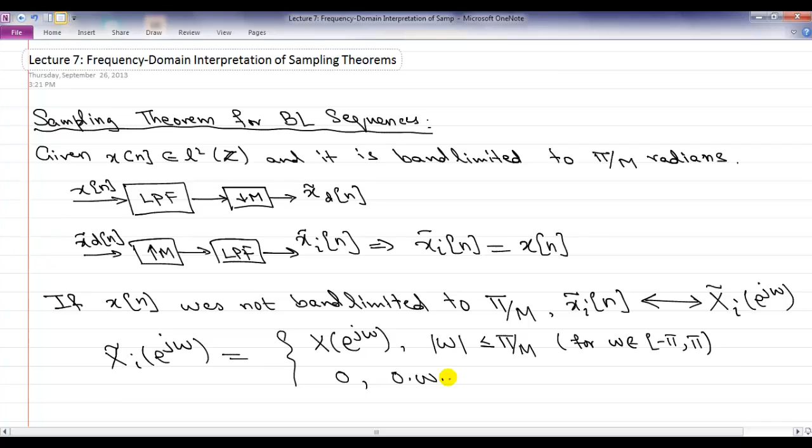So that is what this lecture and perhaps the next lecture will be about. We are done doing the basic expressions for sampling of continuous and discrete time sequences. We are now going to move forward towards the frequency domain interpretation of different components of these sampling operations. So the operations we have seen in the continuous time sampling, discrete time sampling, there are two main types of operations. There is filtering operation, and there are these sampling operations or conversion from sequence to an impulse train, or this decimation or upsampling. So let's look at, of course, the filtering operation.

So we are given a signal and we do filtering of that. Now the input could be continuous time or it could be discrete time. So x of t or x of n. At the output we get y of n or y of t. As long as the filtering operation, this block is LTI, we exactly know how the inputs and outputs are related.

So if we say that the filter is given by, in discrete time it is hn, which has h of e to the j omega, and in continuous time it is ht, which is h of j omega, we know exactly how they affect the output. So in the discrete time, in frequency, the output is simply multiplication of your DTFT of the input times the frequency response of your filter. Similarly, in continuous time, we have a similar expression. The output frequencies are simply the product of the input frequencies and the frequency response of your filter.

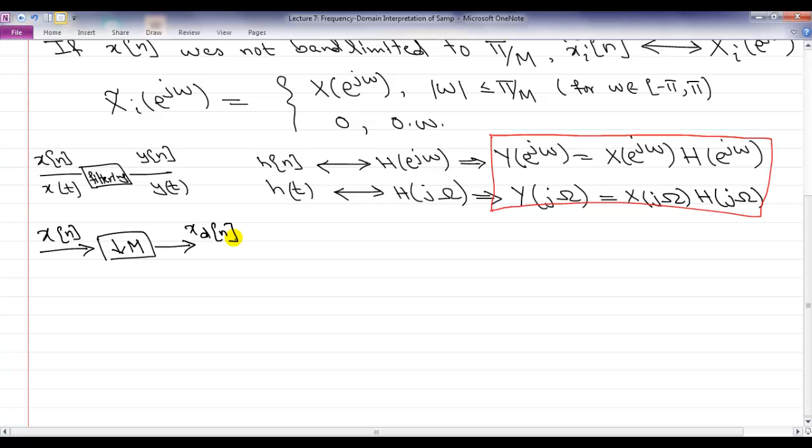Since we were talking about discrete time systems, let's continue our discussion of those. One of the components we studied was this decimation operation. You are given some sequence xn, you get xdn. So let's understand what this decimation operation does in the frequency domain.

The analog of that in the continuous domain is that we got x of t, we multiply it with an impulse train s of t, so summation delta of t minus nt, and we get back xs of t. And if you remember, we were able to show that this xs of j omega is simply given by scaling of your amplitude and multiple copies of the Fourier transform of your input signal. It's given by xj omega minus 2 pi k over t.

We are looking for some sort of similar expression in the discrete time case. So the question we are asking is, if this thing has a Fourier transform xn, x of e to the j omega, and this thing has a Fourier transform xd of e to the j omega, what is the relationship between these two if you pass them through this decimation operation? That is going to be our first goal.

Now to do that, we have to again do the same trick as we did in the continuous time, which is we try to express this operation as multiplication with some sort of an impulse train. Remember the definition of decimation, which is xd of n is given by xn of m for n equals 0, plus minus 1, plus minus 2, and so forth. So my goal is I'm looking at this xdn, which is given by every m samples of my original signal xn, and I'm going to express this as multiplication with an impulse train.

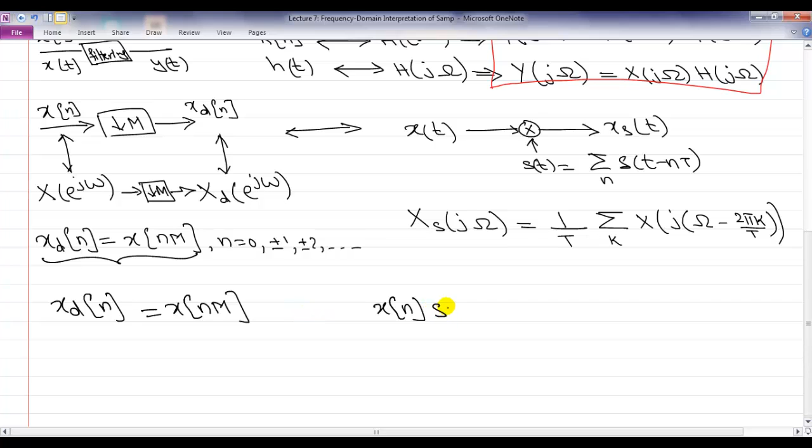So whether I write this as xdn equal to xnm, or I multiply my x of n with s of n, where s of n is an impulse train, so x of n times summation from k minus infinity to infinity delta of n minus km, and I now subsample this thing every m samples to get back xdn. The claim is that both of these operations are the same.

So why? Because what is xdn doing? It is collecting, it is keeping the mth sample and throwing away every m minus 1 samples. Now what is this thing? This is just an impulse train which is non-zero at multiples of m and 0 everywhere else, up to m minus 1.

Now whether I first downsample my xn directly, or I multiply my xn with this train, which is going to actually make all my samples between 0 and m 0, and then downsample, it's going to be the same operation, because the values that I'm going to make 0 in xn, those values I was not going to keep anyways.

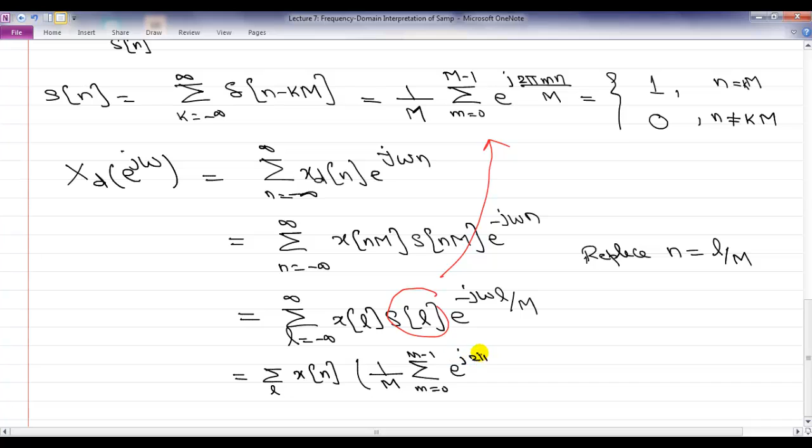Now I am simply going to replace this value of S[L] using this formula. So I get a summation over L of X of n, times 1 over m, summation m equals 0 to m minus 1, of e to the j 2 pi m L over m, times e to the minus j omega L over m. So I'll just replace this S[L] with its formula.

Now I'm just going to do a change of summation order. I'll bring this summation over m outside and take the summation over L inside. So I'll get 1 over m, summation of m equals 0 to m minus 1, and the other summation is L from minus infinity to infinity, X of L, times e to the j 2 pi m L over m times e to the minus j omega L over m.

So that is 1 over m, again summation over m, 0 to m minus 1, summation over L, X[L], and I'm going to put both of these exponentials together, so I get e to the minus j times (omega minus 2 pi m L over capital M).

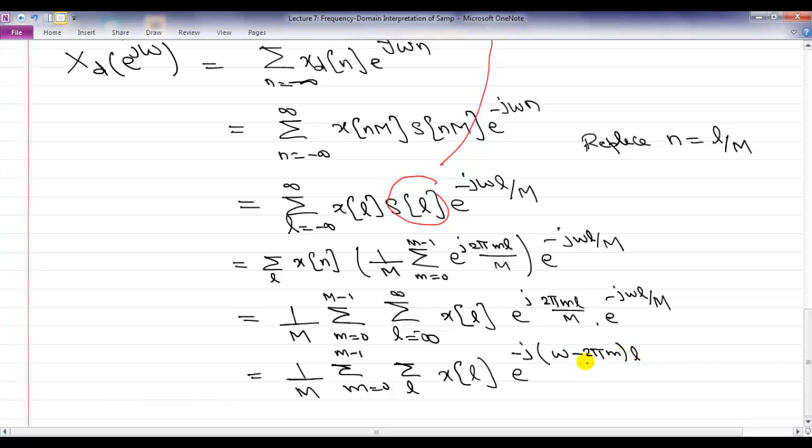Now, just to remind ourselves, we are computing xd(e^{j omega}). Let's look at this expression inside the first summation. What is this expression? It is simply equal to x[n] e to the minus j omega n, with omega replaced by omega minus 2 pi m over capital M. In other words, this is just the DTFT of x[n], where instead of omega, I have omega minus 2 pi m over capital M. So this whole expression is simply X(e^{j(omega minus 2 pi m over capital M)}).

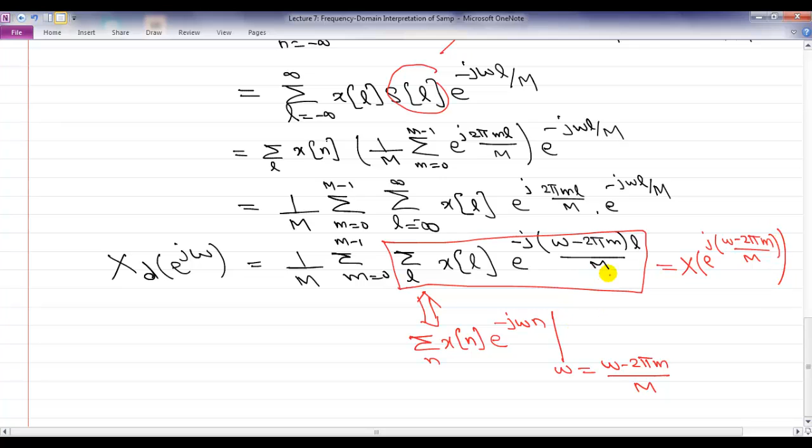Which means that the Fourier transform of my decimated signal is simply 1 over m, summation of m equals 0 to m minus 1, of X(e^{j(omega minus 2 pi m over capital M)}). So that is the relationship between the input and the output of a decimator.

What is the relationship saying? First of all, your output frequencies are simply given by your input frequencies, scaled by some factors. There is first an amplitude scaling by a factor of 1 over m. If you remember what happens to the frequency of xs(t), there was a factor of 1 over T there—it's very similar in discrete time, there's a factor of 1 over m. There's also a scaling of your frequency axis by a factor of m—this thing is doing frequency axis scaling by m.

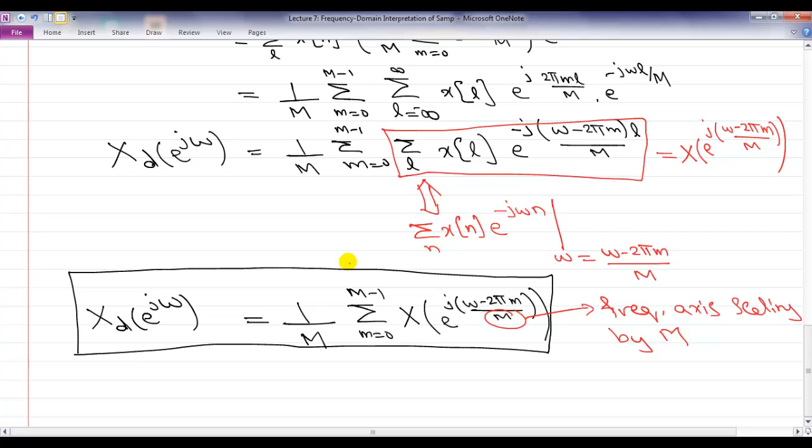The main thing that happens in the case of decimation is the following. Decimation does three main things. Number one, xd of e to the j omega has amplitude scaling by 1 over m - that is very analogous to the continuous time case. The other difference from the continuous time world is that you get m copies of the DTFT instead of infinite copies as in continuous time.

The third thing is that each copy is, number one, scaled in frequency by a factor of m, and then number two, shifted by an amount of 2 pi m. So decimation does these three things: it scales your amplitude, gives you multiple copies - m number of copies - and each copy is given by scaling your frequency axis by m and shifting by 2 pi m.

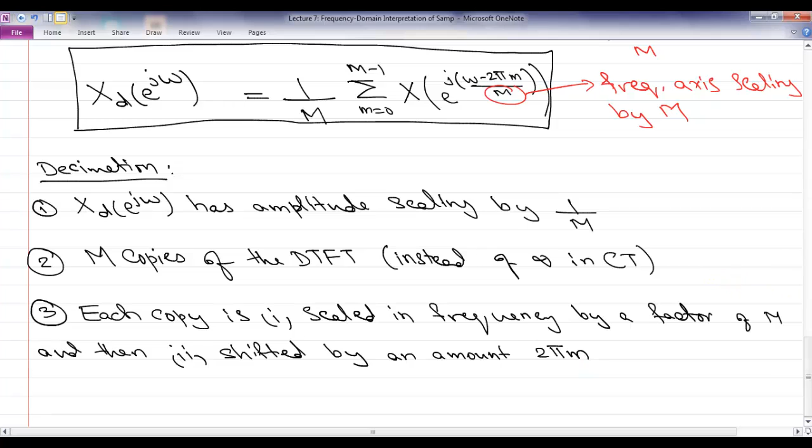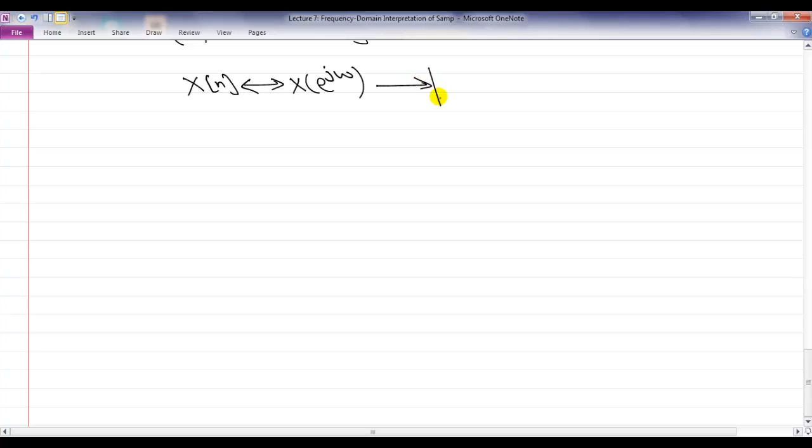So let's take a look at an example to give you a better sense of what happens. Let's say you are given an xn, whose Fourier transform is x of e to the j omega. You decimate it by a factor of 2, and we get xdn, given by xd of e to the j omega in its Fourier transform. Let's look at what this does, assuming that x of e to the j omega is given by the following.

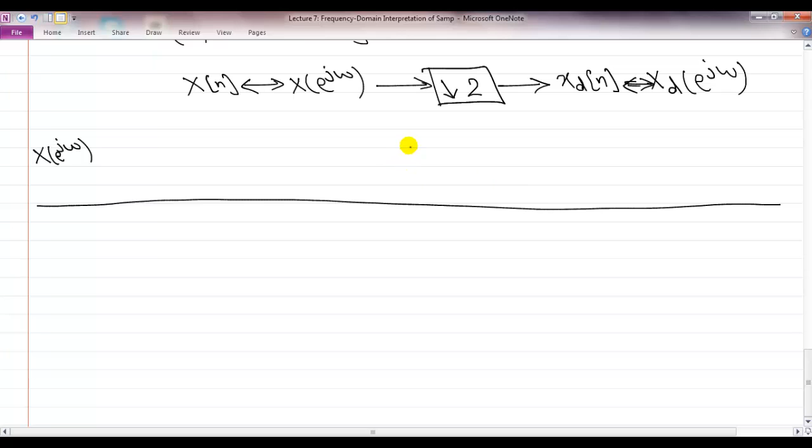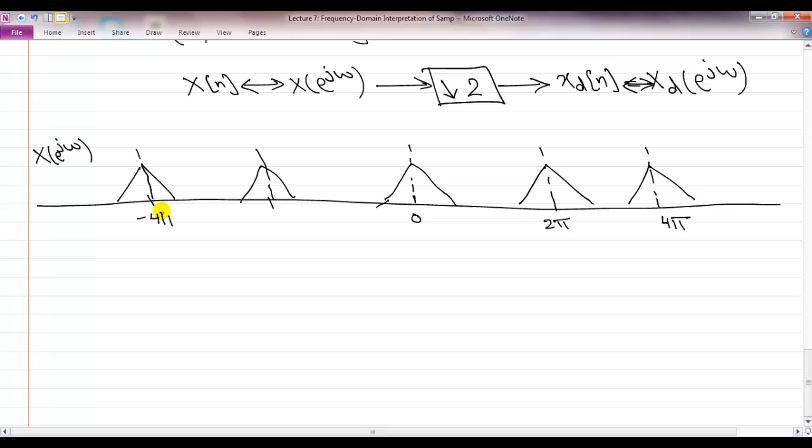Let's take our usual diagram of a triangular region. This is my 0, my 2 pi, 3 pi, 4 pi. So this is 0, 2 pi, 4 pi, similarly minus 2 pi and minus 4 pi. Minus 2 pi, here is pi, here is 3 pi, minus pi, minus 3 pi.

To compute this, we need to first look at two copies of this same Fourier transform. Each copy's amplitude is scaled by 1/2. So I have replica 1, which is simply x of e to the j omega minus 2 pi times 0, which is 0 over 2. What would that replica look like? First, your amplitude - if this amplitude was a, it becomes a over 2. Now the endpoints, let's assume for concreteness these were at pi by 3 and minus pi by 3.

This whole frequency axis is getting multiplied by a factor of 2 - things are being stretched. So this pi by 3 frequency moves to 2 pi by 3, ending up at 2 pi by 3 and minus 2 pi by 3. Now this 2 pi copy gets multiplied by 2 and ends up at 4 pi - so this one comes down and moves to 4 pi with a height of a over 2, since you have a stretching of the frequency axis. Similarly, this copy will move to minus 4 pi, again minus 2 pi times 2, with a height of a by 2. So this first replica has nothing between minus 4 pi and 0.

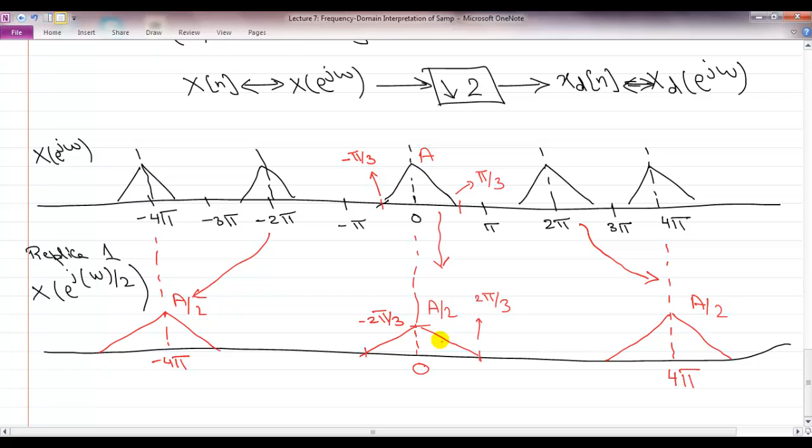Now the second replica, replica 2, is given by x of e to the j omega minus 2 pi over 2. You can actually derive this from replica 1, because it's the same thing - I should have a 1 over m factor since I'm reducing the height by a factor of 2. So to figure out what this replica looks like, you just look at the above one and shift it by a factor of 2 pi. This means that this copy will actually move to 2 pi with a height of a by 2. And this minus 4 pi copy is moving to minus 2 pi.

And there is, of course, nothing at 0 or 4 pi and minus 4 pi. So these are the two replicas, and to get to the final Fourier transform, we just add them both up.

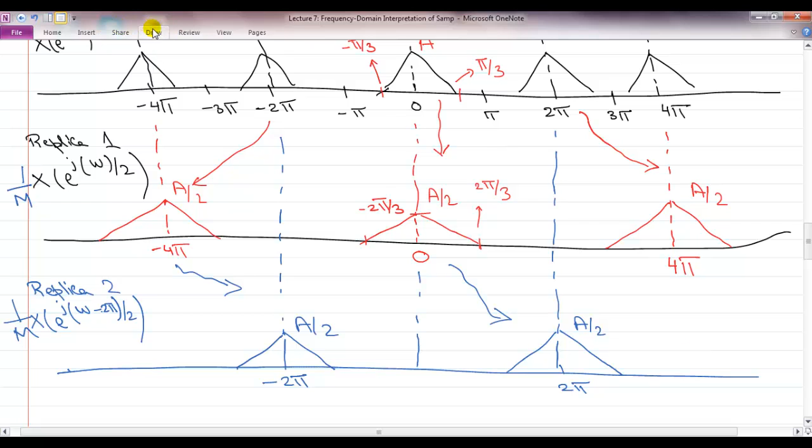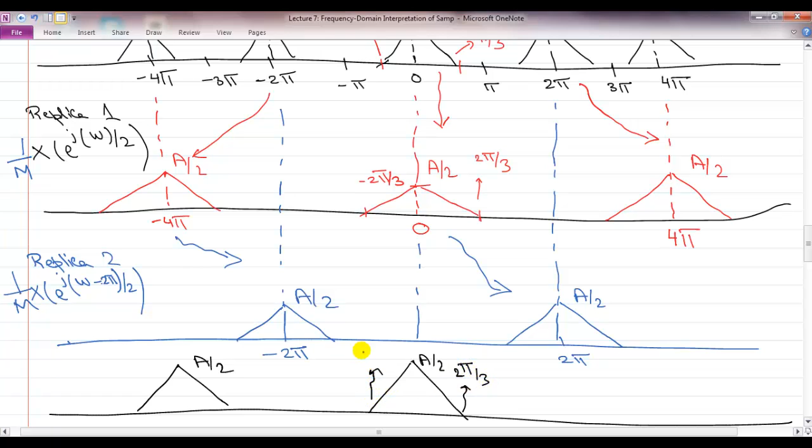If I add both these replicas up, what I get back is a copy here due to the red copy, with the height of a by 2, and these things become 2 pi by 3. And then, of course, a copy here, a by 2. Then due to this blue thing, I also get copies at minus 2 pi and 2 pi, which look like this.

So another way you could have actually just thought of this Fourier transform is that you just look at your original Fourier transform and you just stretch the whole thing by a factor of m and scale the amplitude by a factor of 1 over m. That's another indirect way of thinking about it, because everything is periodic.

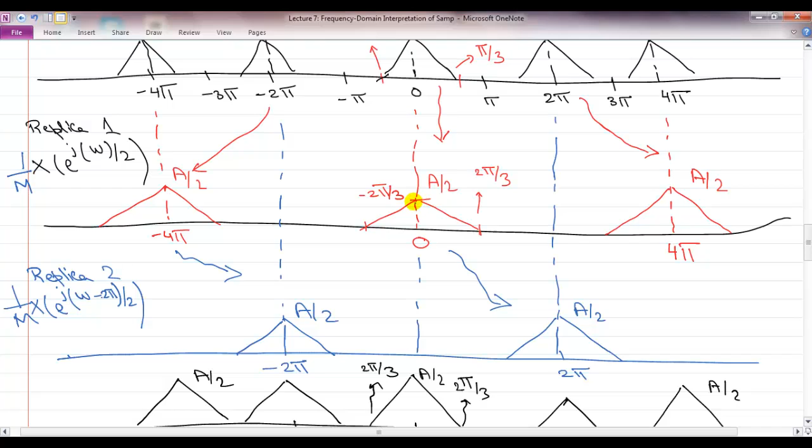Remember, in Fourier transform, if you know what the things are between minus pi and pi in the discrete time world, you can just replicate them, because discrete time Fourier transform is periodic. So this is what the meaning of the multiple copies is. One copy gives you values at 0, 4 pi, and then it will move to 8 pi, and so forth. The other copy will sort of fill in the holes for 2 pi, minus 2 pi, and so forth.

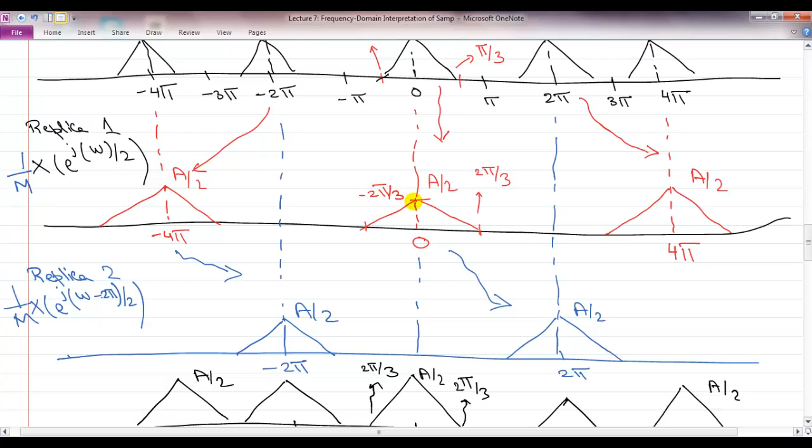And then you add them all up and you get this all filled up Fourier transform, in which the main thing that has happened is your amplitude has scaled by a factor of 1 over m, and your frequency axes have stretched by a factor of m.

So if you had a frequency which was available at 0.1 radians in the previous sequence, that same frequency will appear in the decimated signal at 0.1 times m.

So that's the effect of decimation on discrete sequences. It doesn't matter whether the sequence comes from continuous time or not. If you are given a discrete sequence and you decimate it, the frequencies primarily move to another location, given by scaling by a factor of m.

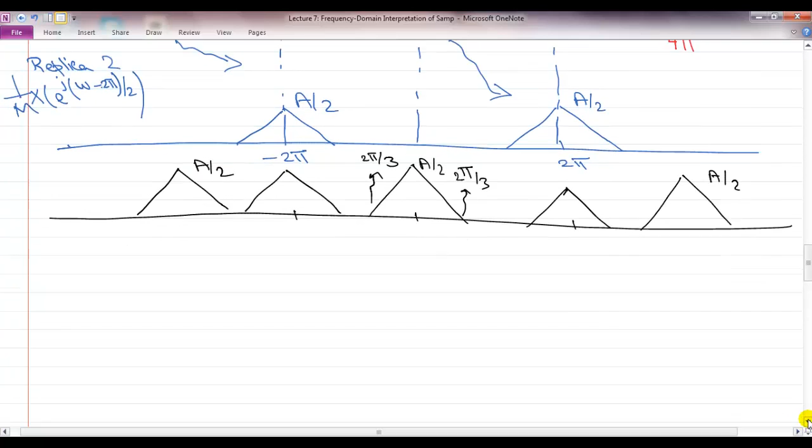In this example, we had taken the case purposefully of x of e to the j omega being band limited to pi by 3 radians. So when we scaled the frequencies, they went to 2 pi by 3. Let's ask the question: what happens if it was actually band limited to another number such that when I scale, the scaling goes beyond pi?

So let's assume that we had a signal which was band limited to actually 3 pi by 4 radians. So assume that you are given x of e to the j omega band limited to 3 pi by 4 radians. What happens if I now take that sequence and decimate it by a factor of 2?

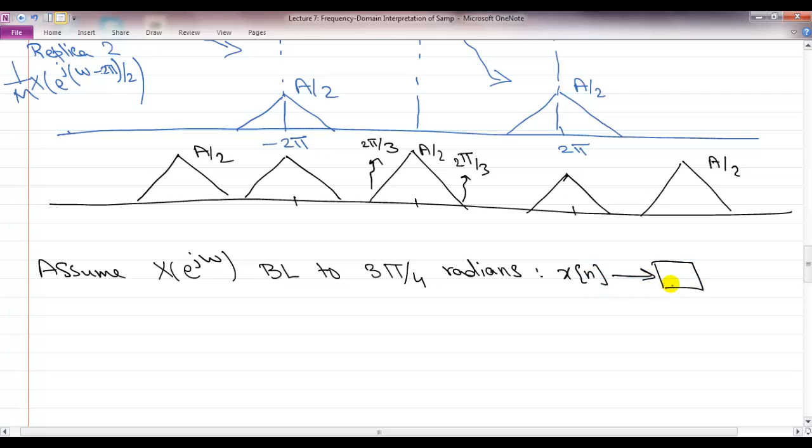The effect that we get is very similar to the effect of aliasing that we saw in the continuous time world. We are looking at multiple copies, and each copy is now being stretched.

So instead of drawing both copies and then adding them up, I'm just going to go to the shorthand. If my original sequence was like this, this was its Fourier transform. This is 3 pi by 4, minus 3 pi by 4. This is minus pi, pi. And of course, you have the same thing at 2 pi and minus 2 pi.

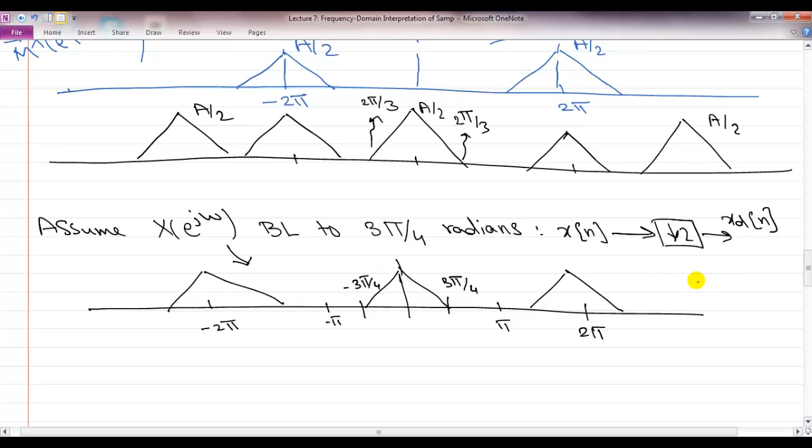So if this is my x of e to the j omega, and I do decimation by a factor of 2, let's say again the height is a. Let's just look at the main copy and then replicate that everywhere else. So what happens to the main copy? The height gets scaled by 1 over m, so it will become a by 2.

But these endpoints will be scaled by a factor of 2. So these endpoints will go to 3 pi by 4 times 2, that will go to 3 pi by 2. Which means that these endpoints will go beyond pi. So if this is your pi, your endpoint will actually end up going here, at 3 pi by 2. Similarly, this is minus pi, and your endpoint will go beyond that, to minus 3 pi by 2. Now you are going to do the same with all the other copies.

So if I look here, I'll have the same thing happening: this thing will go beyond pi too. Similarly, this thing at minus 2 pi will go beyond pi.

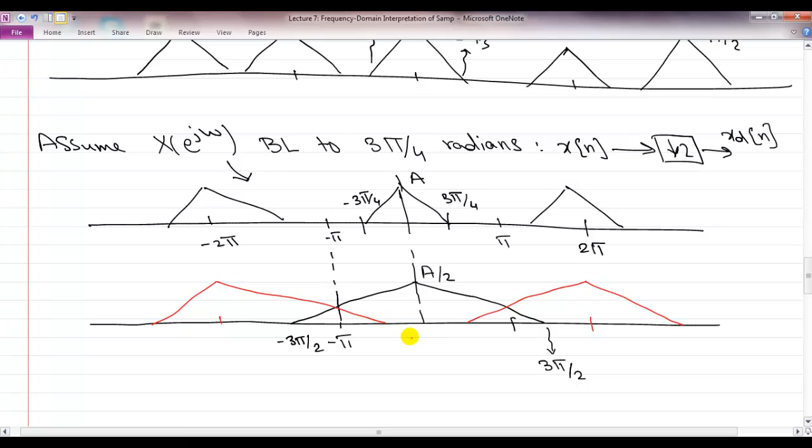The Fourier transform of my decimated signal is effectively the sum of these copies. Up to this point I get the same, but here I now add the two copies up, and I get this. Similarly, I get up to this point this, then I add the two copies up, and so forth.

So what is happening is that in the discrete world, frequencies near pi are the high frequencies. I'm having the same kind of relationship where frequencies after pi are just folding down into the lower region, and they are corrupting your other frequencies. They are aliasing into lower frequencies, assuming the identity of different frequencies.

And that helps explain the purpose of the pre-filter in discrete sequence sampling that we studied. For the band-limited sequence, the assumption is that you always cut off at pi by m, and then you do decimation by a factor of m.

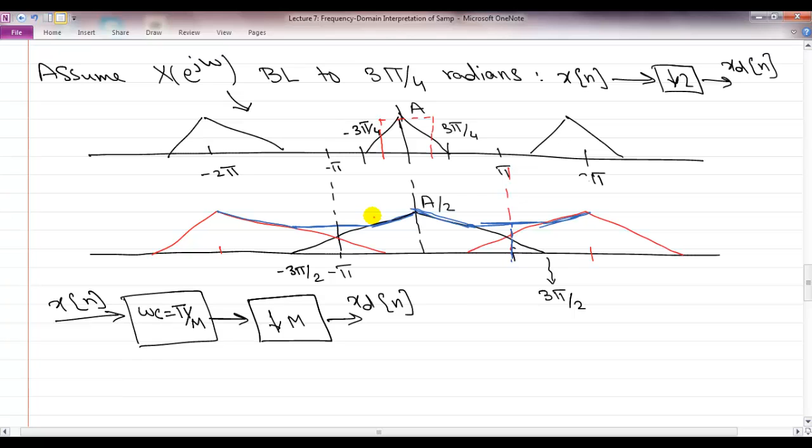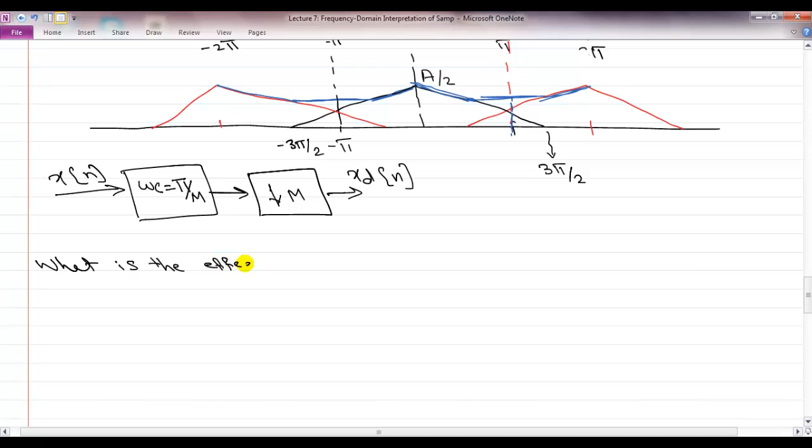Let's now look at what the expander does. The question is, what is the effect of expansion on the frequency content of x of n? That is actually a much simpler thing to evaluate than the decimation part.

If you remember the expander, with the notation of an up arrow with a factor of m, x e of n is simply given by taking your sequence and inserting m minus 1 zeros between any two samples. Stated differently, that is equal to the summation from k minus infinity to infinity of x of k, delta of n minus km.

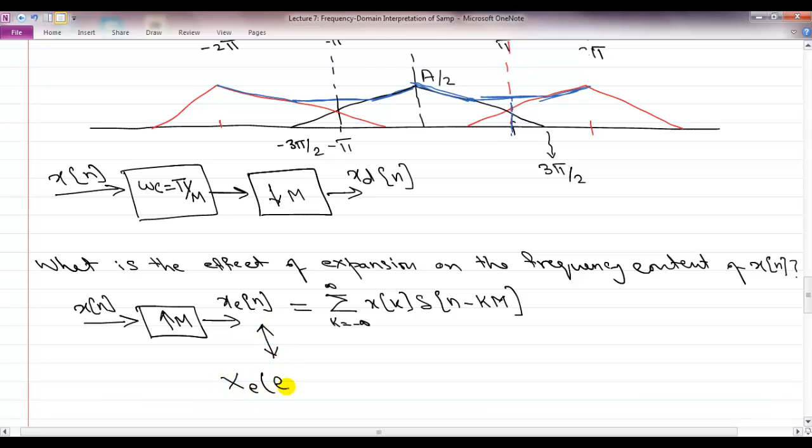So I can compute the Fourier transform of this thing: x e of e to the j omega is the summation over n, and then summation over k, of x of k, delta of n minus km, times e to the minus j omega n.

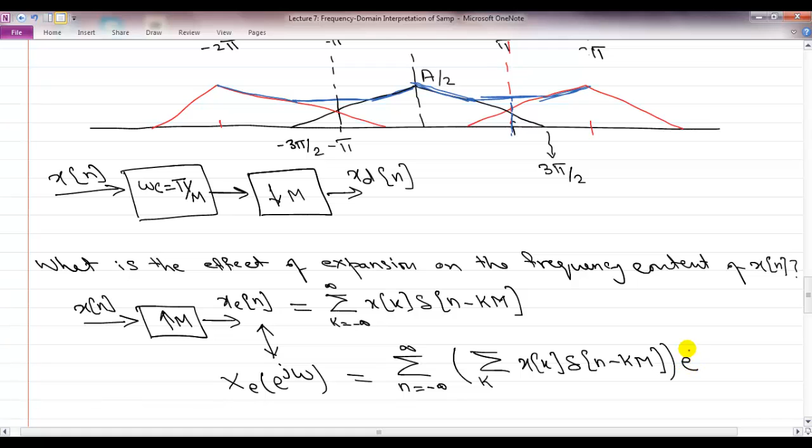Now I'll just change the order of summation. I'll take the summation over k outside, and take x of k outside too, and inside I'll have the summation over n of delta of n minus km, e to the minus j omega n. Let's look at this expression.

Now this thing, delta of n minus km times e to the minus j omega n, is simply equal to e to the minus j omega km. So this whole summation is just given by e to the minus j omega km.

Simple evaluation, and if we put that in, we get the summation over k of x of k, e to the minus j omega km.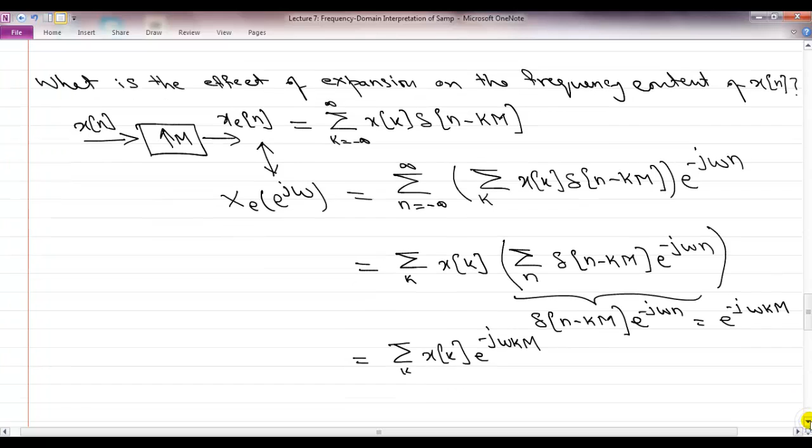So let's look at this thing. This is nothing but, if I just compute x of n e to the minus j omega n and replace omega with omega m, then this is the same thing. Of course, k or n are dummy variables, so they don't matter.

So what is this thing? This thing is simply x of e to the j omega m. This is the Fourier transform of my x, and this is effectively saying that the expanded sequence's Fourier transform is given by a simple scaling of the frequency axis of your original Fourier transform. The end expression we get is that xe of e to the j omega is simply equal to x of e to the j omega m.

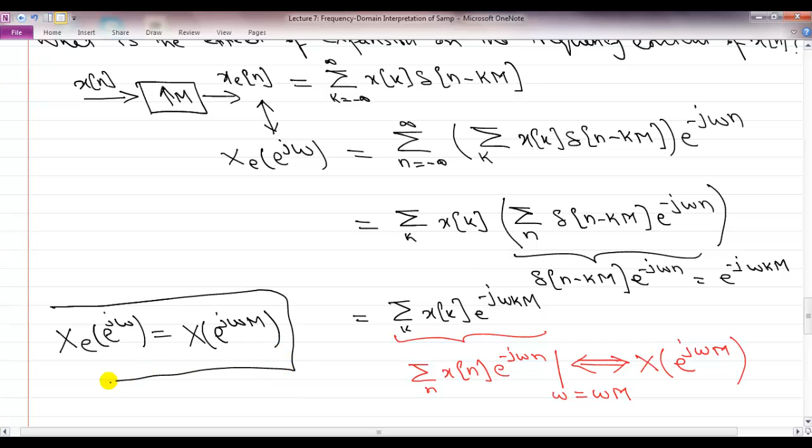No multiple copies, no scaling of amplitude, just a pure scaling of the frequency axis by a factor of 1 over m. So if we take an input sequence and just add zeros in between, all that happens is our frequencies get scaled by a factor of 1 over m. If you had a frequency at pi by 2, it starts appearing at pi over 2m. So while decimation did a stretching of the frequency axis, your frequencies get multiplied by m, expansion does a compression of your frequency axis. So it's expansion in time, but compressing the frequency axis. Frequencies get multiplied by 1 over m.

The usual duality experience that we have is that if you do something in time, in frequency the sort of opposite happens. We are doing expansion in time, we end up compressing in frequency.

So we can say that the effect of expansion is simply: the DTFT of the expanded sequence xe of n is simply given by the DTFT of x of n with the frequency axis scaled by 1 over m.

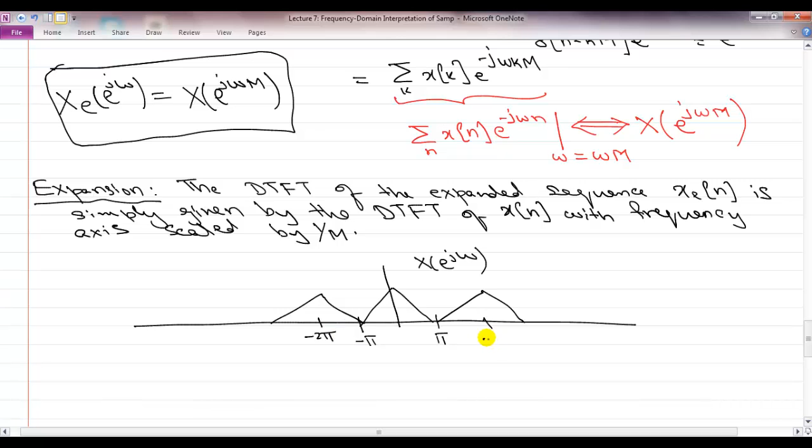So if I am given, for example, just take again the usual picture: if I am given a Fourier transform x of e to the j omega, and let's say it goes up to minus pi and pi, okay, 2 pi, minus 2 pi. Well, there is no amplitude scaling at all. Nothing happens in the amplitude. What happens is scaling of the frequency axis.

So you get this: pi moves to pi over m, this 2 pi copy moves to 2 pi over m, and that keeps on going till you hit pi. So originally you have only one copy of your main signal between minus pi and pi. By doing this compression within minus pi and pi, you are actually going to get more than one copy. You are going to get m minus 1 copies because you are compressing things inward.

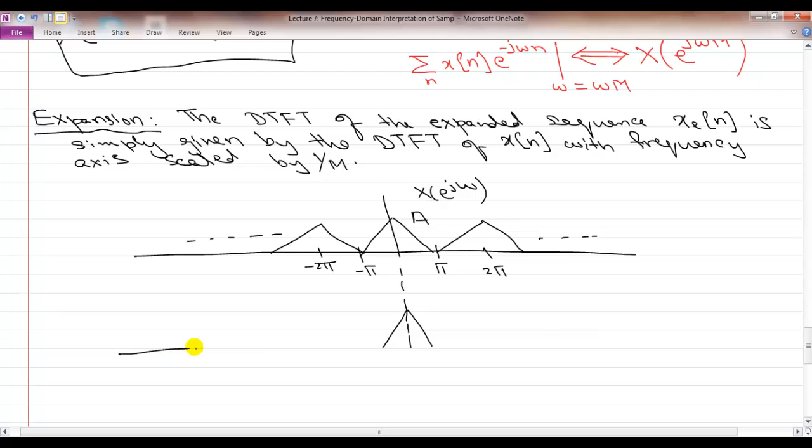So to understand that better, let's relate to the special case of m equal to 2 just to concretely see that. For m equal to 2, this will become minus pi by 2 and pi by 2. And this copy, of course, will move to pi, and we'll get this. And this copy will also move to pi, so we'll get this copy and this copy.

So this triangle is coming from this side, from 2 pi, and this triangle is coming from minus 2 pi. So between minus pi and pi, previously I just saw one triangle, and now between minus pi and pi, I'm getting this whole thing.

Now, if you remember for reconstruction, what do we do in the case of band-limited signals? We say, you are given some xd of n, you first do expansion by a factor of m, and then you do a low-pass filter with a cutoff of omega c equal to pi over m. So effectively, what this filter does in the case of band-limited signals, our filter was given by sinc. Sinc is a low-pass filter. The cutoff for that was pi over m.

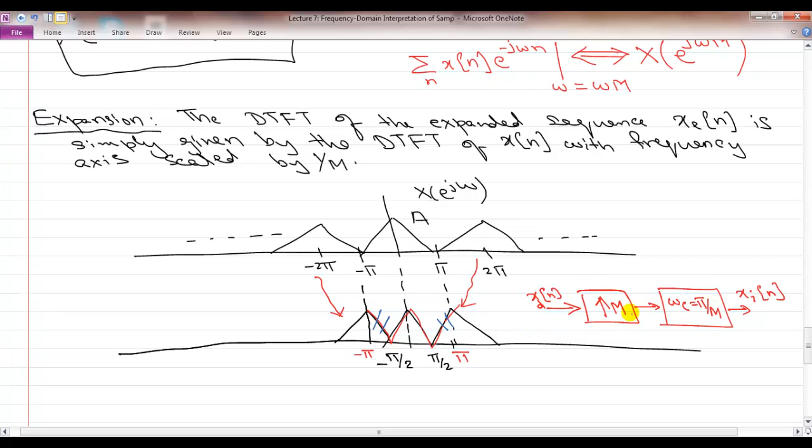But in general, the main goal we were after is to figure out what the expansion does in frequency, just this block alone. And we saw that this block simply compresses the frequencies by scaling the frequency axis by a factor of 1 over m.

So they are complementary to each other. If you do decimation, your frequency axis gets scaled by a factor of m. You get multiple copies. You can think of those multiple copies in whichever way you want, but you can also just think of the principal period between minus pi and stretch that. In expansion, the opposite happens. Your frequency axis gets scaled by a factor of 1 over m. The main difference between the two is that there is a scaling of the amplitude also in decimation. In expansion, there is no scaling of the amplitude.

If we are given digital systems which are doing sampling of discrete sequences using decimation, or they are doing expansion, or they are doing filtering, from end to end we can write down what happens to the frequencies. It's not too difficult to go through each step separately and figure out.

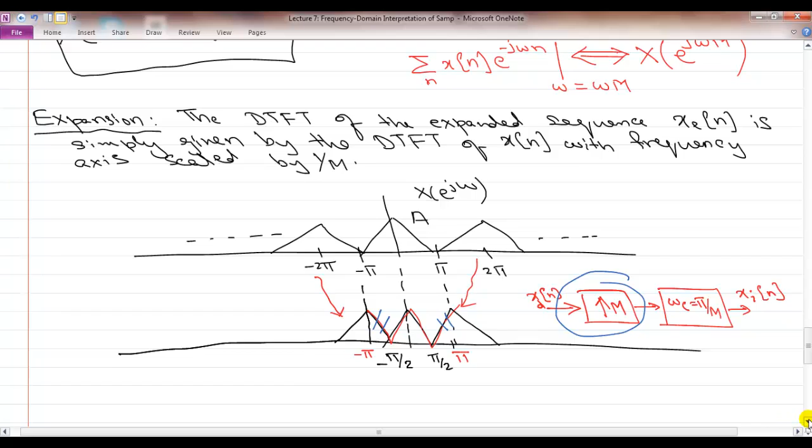For example, if you are given a sequence xn and someone says there is first an upsampling, then there is some filter - I'm not going to say what the filter is doing, it's h1 e to the j omega - then there is some downsampling. Then perhaps another, and these factors don't have to be the same, m1 and m2. Then there is an upsampling by a factor of m3 and another filtering, and the output is yn.

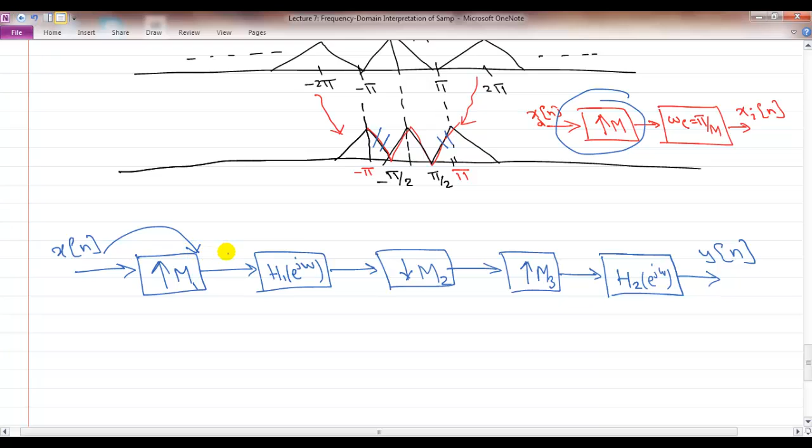Well, it's very easy to figure out what the output is, because you can go, in the frequency domain, from here to here. You know what happens to the frequencies - a scaling of the axis. You go from here to here, you know what happens to the frequencies - simply multiplication with the frequency response. You then go from here to here - again you have scaling of the axis and amplitude scaling. Then you come from here to here, the same thing. And finally, another multiplication with the frequency response.

So no matter what kind of digital system you are given, their blocks are going to be only either upsampling, downsampling, or filtering. If that's the case, then you can easily write end-to-end expressions. So there is nothing more for us left to be done in terms of understanding the frequency aspects of these blocks in discrete time.

There is only the remaining thing left for us, which is actually understanding a couple of blocks in continuous time and understanding a couple of identities in multi-rate signal processing, which are very useful in terms of, if you are given, let's say, a downsampling operation where you are required to first do anti-aliasing and then do downsampling.

So let's say you are given a system where you are supposed to do a low-pass filter with cutoff frequency of pi by 16, and then you downsample by a factor of 16.

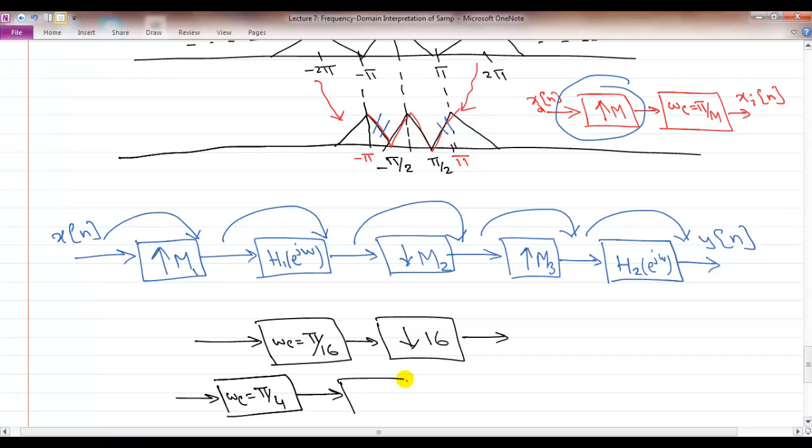That goes back to two fundamental identities in multi-rate signal processing, which let you change the order of downsampling or decimation and filtering, so that the final input-output relation doesn't change. So we will see that this very same expression can be implemented by having filters which cut off at, let's say, pi by 4. Then you downsample by 4. Then you have another filter with cutoff of pi by 4, and then you downsample by a factor of 4 again. And if you think of it now, you have to implement filters which have a larger bandwidth - pi by 4 bandwidth rather than pi by 16 bandwidth, which might have been difficult to implement.

So in the next class, we will go over these identities, and we'll look at the remaining 2 pieces in continuous time sampling. Together, then we will be able to figure out, given any DSP system - it could have continuous time signals, discrete time signals - as long as these components are there, we understand what happens with input and output of each of the components. We can write down what will happen when you start from the very beginning and end at the very end by simply traversing each block in the frequency domain. That we'll do next time.